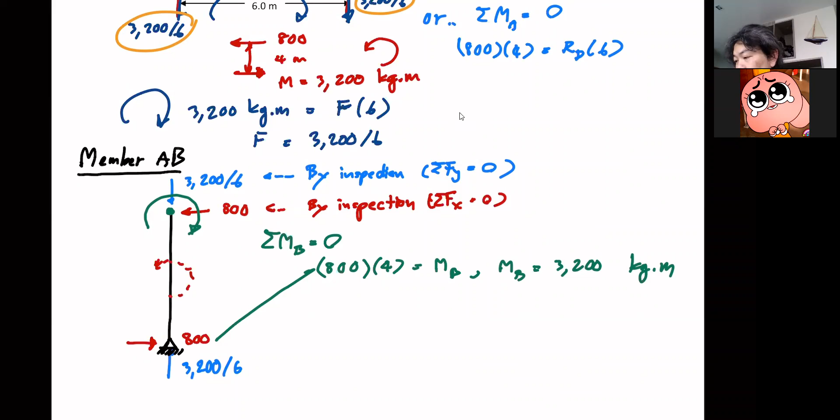Now this is member BC. Let's draw that first, member BC, like this. Now you just need to know that member BC has a joint at B and a joint at C. So joint B will have to take the forces from member AB at the end of this joint. You see, that's the location.

So now you have the clockwise moment at B. You need to have the counterclockwise moment equal to 3200 kilogram meter at B on member BC as well. So this will have to be 3200 kilogram meter.

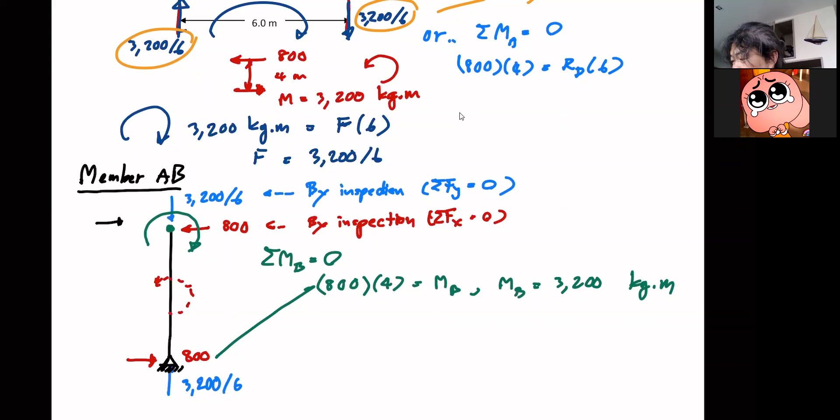Okay, so next is the vertical force, or the axial force, on member AB, 3200 over 6. This one is downward, so you're going to have that upward here. 3200 over 6.

And then the last one: member AB, you have an 800 horizontal force, which is a shear on member AB going to the left. So this 800 is going to go to the right on member BC, and it becomes the axial force on member BC instead.

So now, because this is the force on B, on the end B of member BC, before I proceed I'd like to show you one thing: member BC is quite easy in this case because we don't have any force acting on the member itself. So completing this free body diagram is rather easy, but it's not always like this.

So, maybe I should do this. Okay, so again, take sigma Fx equal to 0. You know right away that this has to be 800 by inspection again.

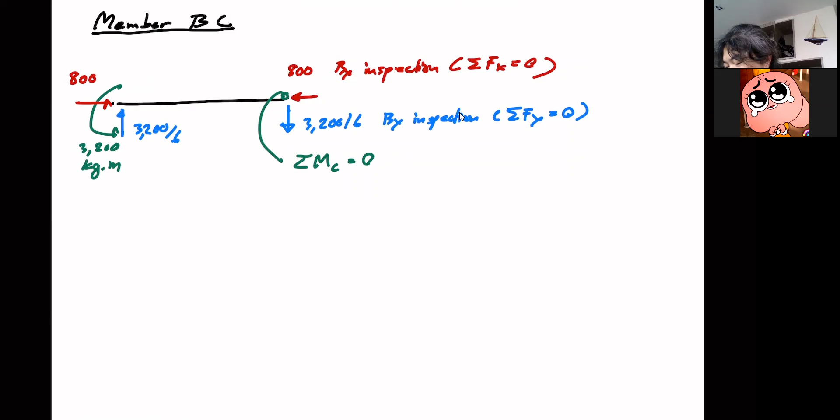Okay, so now what about a moment? You can easily take a moment at C here. Sigma MC equal to 0. So you see, when you take moment at C, you have 3200 as a moment, and let's say it's counterclockwise. I don't mind the sign very much.

Let's say the moment is positive, but you also have this shear minus 3200 over 6, because this one goes in the clockwise direction, the moment itself goes counterclockwise, right? So they have a different sign, and which one is positive doesn't matter for me. This moment arm is the length of the member, which is 6 meters from this, right? That's 6 meters.

So you see, naturally, plus MC equal to 0. Let's use the green. Oh, forgot that, it has to be multiplied by the moment arm, which incidentally is 6, right? No, let me erase this, it's getting messy. Multiplied by the moment arm, which is 6, then plus MC equal to 0. So look what happens here: they are equal, right? So that means MC is equal to 0.

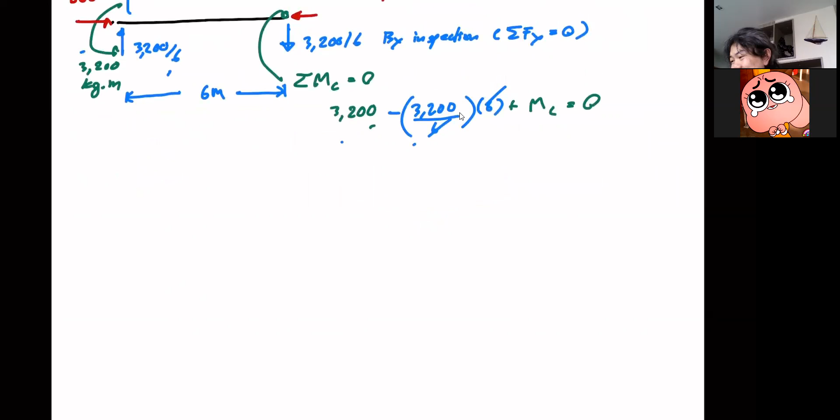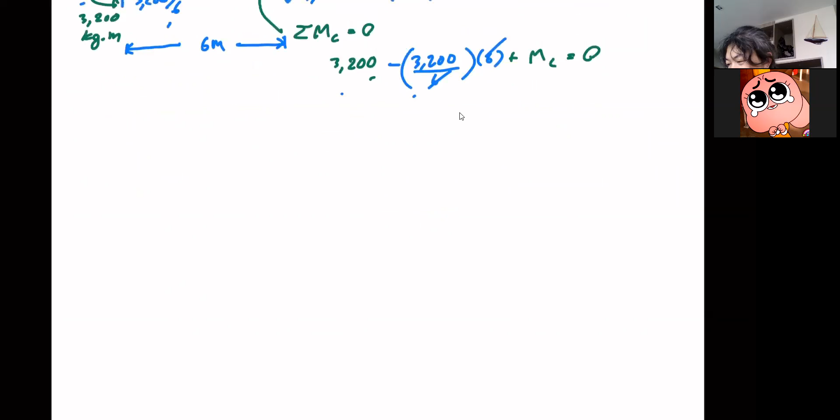Wow, is that possible? It is possible because, let's say, I'm gonna... can I... no. Because when you look at the free body diagram of, let's hope that I have enough, okay, member CD.

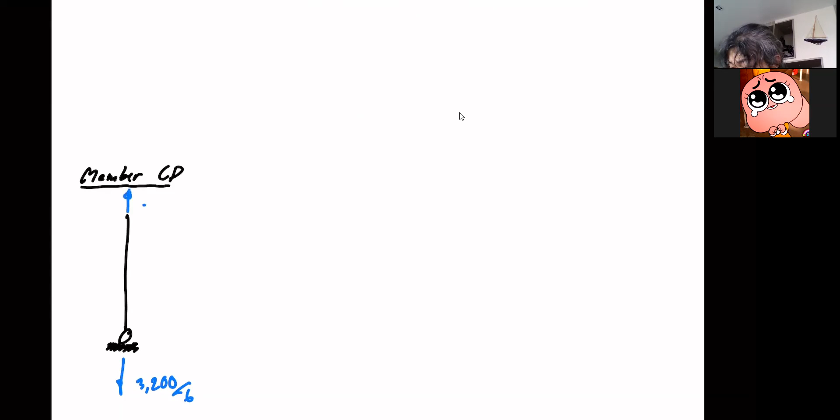Here is a roller. And when you look at member CD, you have the downward reaction of 3200 over 6 there. So by inspection, you know that this better be 3200 over 6 as well.

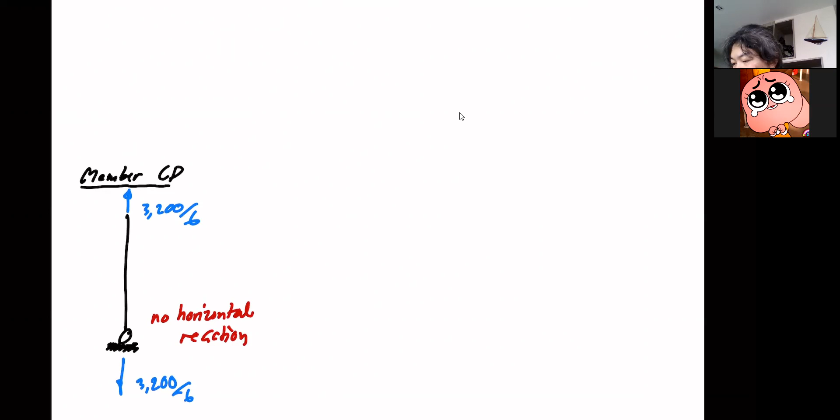There is no horizontal reaction here, right? So if you are going to have some moment at this location, what is there to balance this moment? Because axial force cannot produce moment, right? So if you are going to have a moment at joint C, you better have a horizontal force at D so that you have a chance to balance this moment. So when you know that there is no horizontal reaction here, it's impossible for you to have a moment at C.

So it's only correct that when you take the moment here, sigma MC will give you moment at C equal to 0. In this case, if you have MC not equal to 0, you know right away that you are wrong.

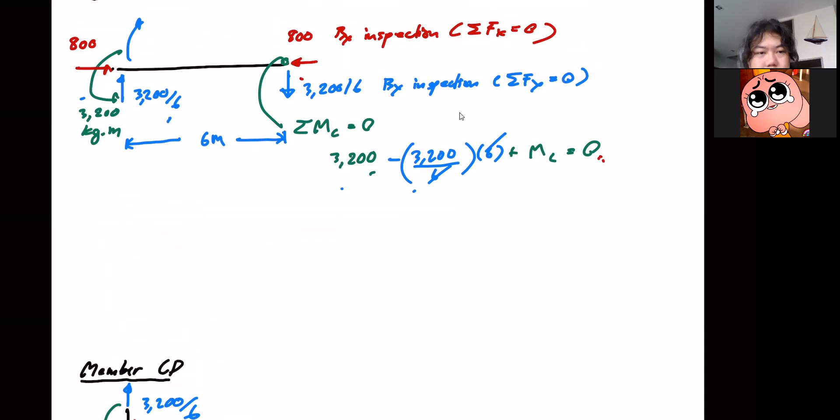Just take a look at the free body diagram of this member alone. That is why I prefer you to draw the support condition on your free body diagram rather than the force. Because if you draw the support here, you will see right away that this is your free body diagram, and you have only this. You cannot have the horizontal force here. No, you can't, meaning this column cannot carry any moment.

We call this a lean column. It only leans onto something. So when you have a support condition like this, you would know right away that there is no chance that you can have moment at C.

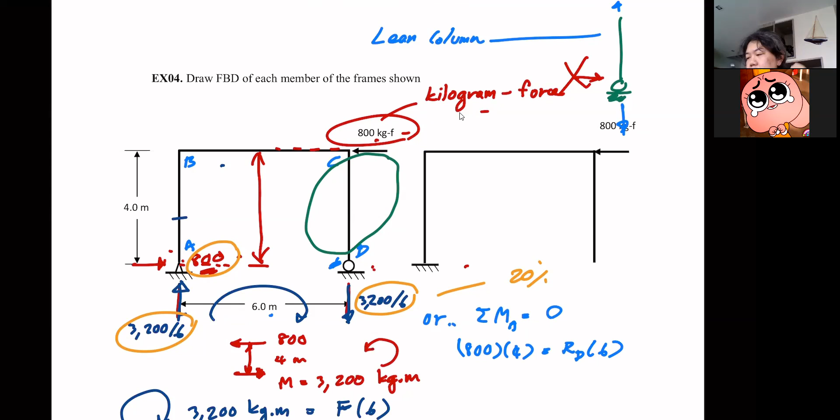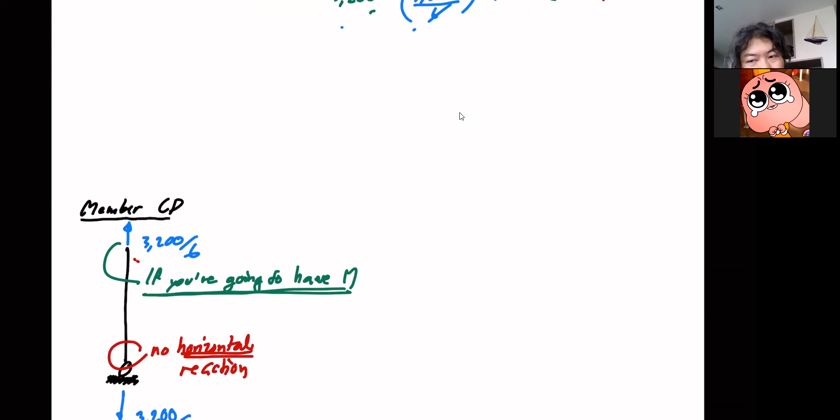Okay guys, so because of this, now you see that right here for member CD, that is the complete free body diagram. It's just the axial force. So this is the lean column, pure column, no moment, no shear whatsoever. So where is the 800 gone?

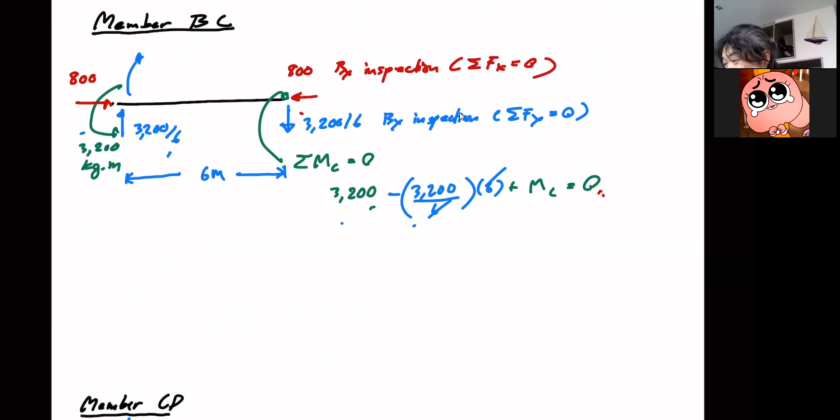Now, to see where the 800 is gone, you need to draw the free body diagram of joint C. That's why we need the free body diagram of the joint now. So this is your C here.

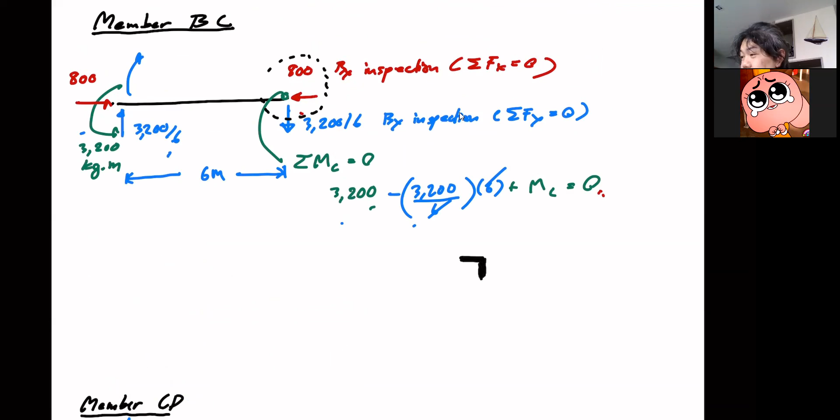So when you look at joint C, you know you have 800 that must go to the right, because this one on member BC here is going to the left. So to balance that, it has to go to the right.

And then you have the downward force, 3200 over 6, down. So this is up, so to balance that, this has to be down. 3200 over 6. So if this is down, it becomes the upward force at this member, you see? So that, voila, it's complete. Everything is correct.

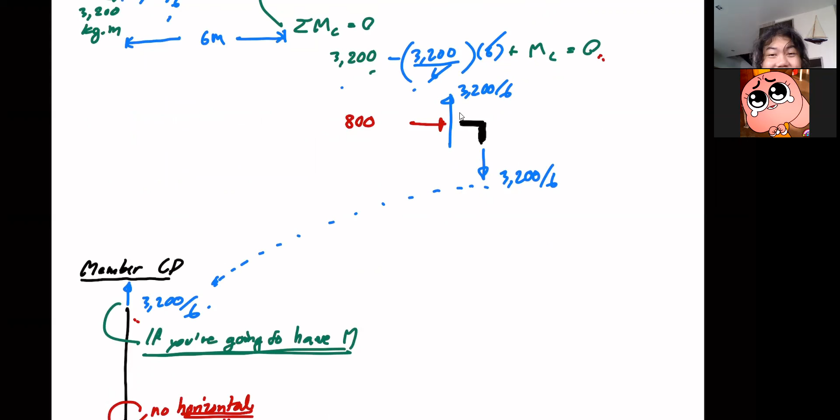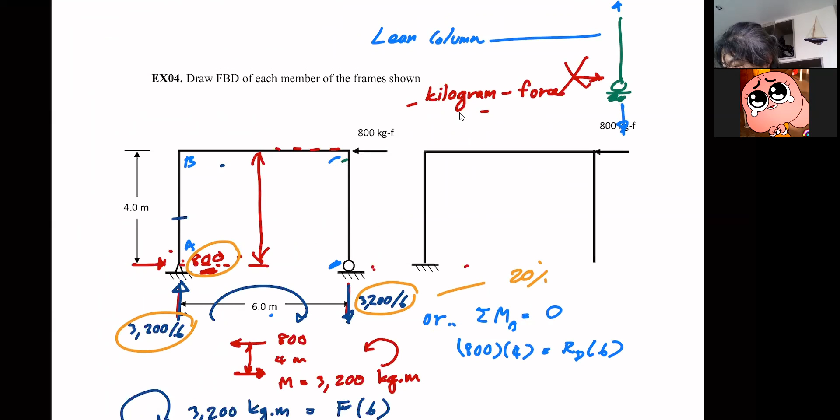And this 800 force is in fact balanced by this one, which is — let me erase this — C and D. This is your external applied force at that particular location, right?

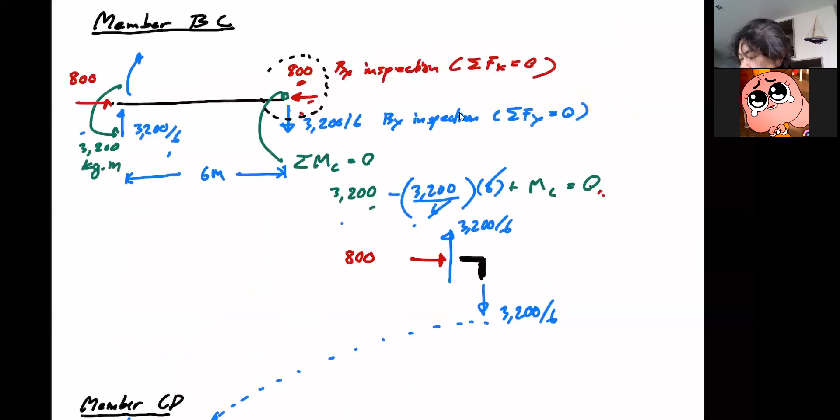Which you must include in your free body diagram. Where could it go, right? It's there. So here is your external applied force equal to 800. So when you look at the free body diagram of this joint, it is perfectly complete. So the 800 is gone because this is equal and opposite, this is equal and opposite, so there is no horizontal force on this location, on another end of your joint.

So no horizontal force coming onto member CD, because if you look at the free body diagram of member CD, you will see right away that you cannot have the force perpendicular to the member. If there is the presence of the force here, you know right away that your member CD will never be under equilibrium. It can't take any shear because it is a roller support in the end.

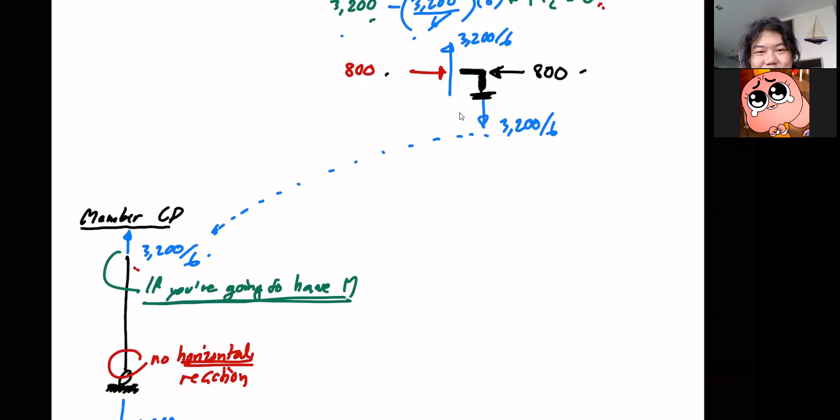Okay, is there any question? Are we crystal clear? Hope so. Yes, yes. What do you mean? Yes, no question, or no, no question. No question, no question. Okay. Yeah, English is supposed to say no.

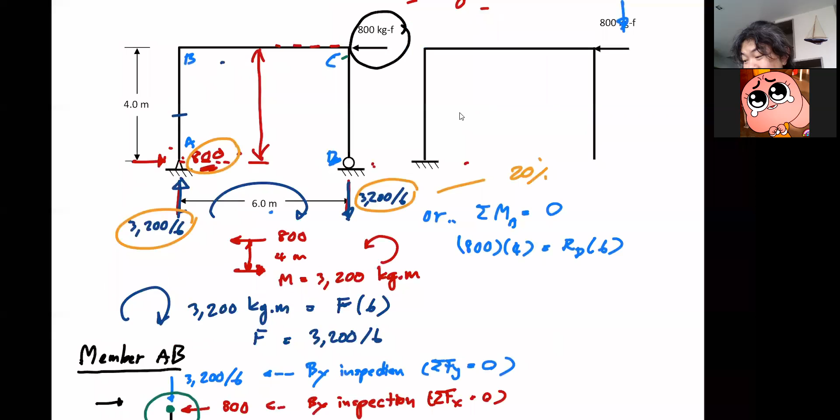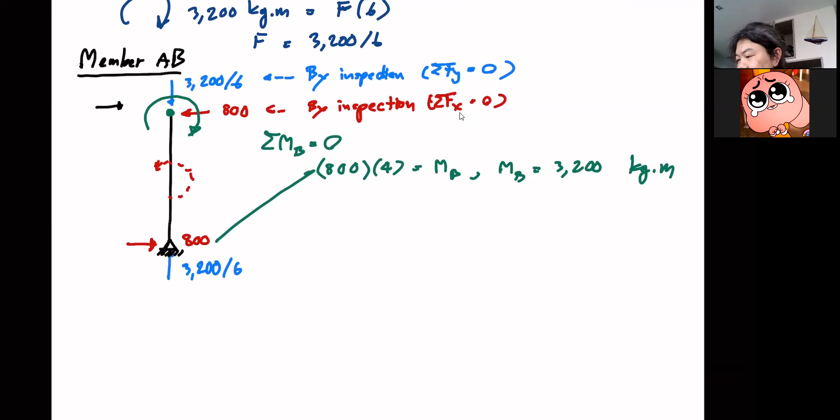Okay, all right, so anyway, we have a job to complete our shear force and bending moment diagram. So I hope you don't mind, it's in the video anyway, and I can do it again here. I think I have enough space.

Another million dollar question doing this is, on which side should I draw my— yes, Nakarin. Nakarin... oh, I pressed the wrong one. Ah, man.

Anyway, it happens. Okay, sir, can I ask you one more question? Please, anytime, please go ahead. How about if we start to consider at member CD? Is it the same as this question?

It is, because in fact you can start your free body diagram, you can start your work anywhere you want, anywhere you wish, anywhere that you think will make your life easiest. In fact, I would myself start from CD because it's easier. But this frame is easy enough to start from anywhere except BC, right? That would be silly. Anyway, yes, the answer is, of course you can.

And the answer would be the same because, mark my words here, ladies and gentlemen, third year students, in your elastic world, one loading condition can have only one equilibrium condition. So that means you have this one frame, you have this load, you can have only one equilibrium. There cannot be a second equilibrium. So to put that straightforward, it means that it doesn't matter where you start, your answer should be the same.

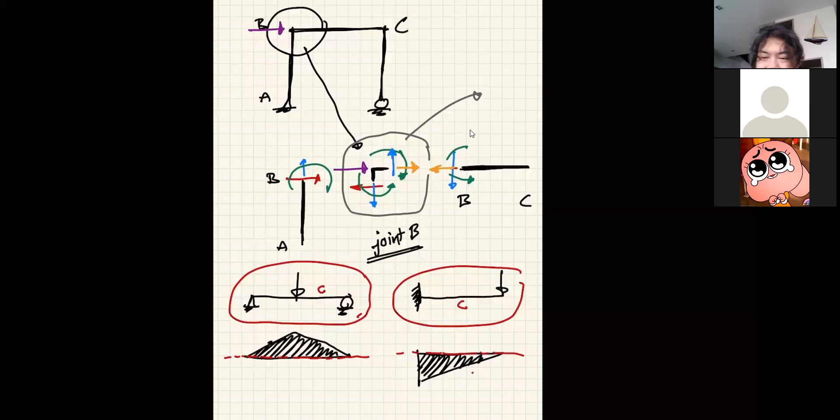What about this beam? Where is your compression? Top or bottom? Bottom, right? So for this beam, you see, naturally, your bending moment diagram is down the zero line now.

That is because we, in this country, tend to draw the bending moment diagram on the compression side of the member. I emphasize: we draw the bending moment diagram on the compression side.

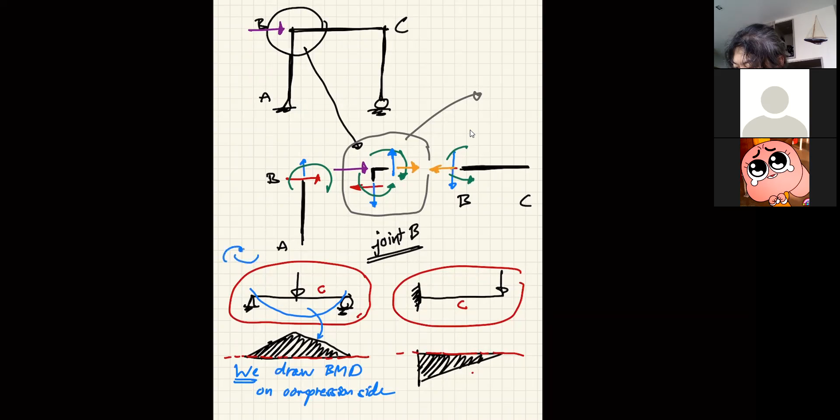Now you guys need to see things better because this is a simple beam, so it bends like this. That is your positive curvature, so it's compression on top. This is also associated with the positive bending moment diagram, so we call it positive curvature as well. And it also is in accordance with your sign convention for positive moment, you see.

So this goes like this. This is your negative sign convention for your bending moment diagram, right? Which is exactly this curvature.

But ladies and gentlemen, I'm going to tell you right now that not every country on this earth draws the bending moment diagram on the compression side. The people with the imperial system, US of A for example, draw the bending moment diagram on the tension side. So with a beam like this, if you go to the US, they draw it like this. And for this, they draw it like that.

Now, I was unfairly mocked by my advisor who said, 'you guys draw a bending moment diagram on the compression side, blah blah blah,' and so on. So it's a little unfair, but they do draw on the tension side.

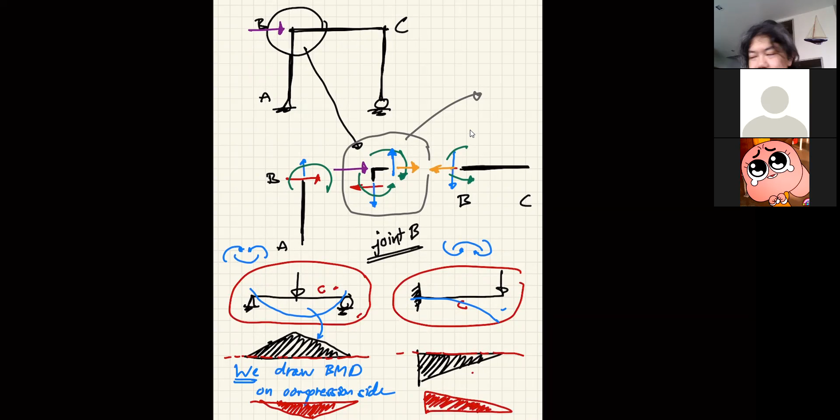The benefit of drawing the bending moment diagram on the tension side is that it will reflect how your beam is going to deflect under load. It gives the deflected shape better, or like this as well. But we are in this country, so I suppose we draw it on the compression side as usual.

So when we come back and look at this member, where is compression, left or right? Now you guys need to feel the structure right away when you see the moment. You just can't say, okay, this is clockwise, this is counterclockwise, let me have 5 minutes to think about this. Engineers must feel stuff like this.

So when you look at the bending moment here, you see how this moment is going to bend your member, right? So here must be compression. Compression is on this side. So if I...

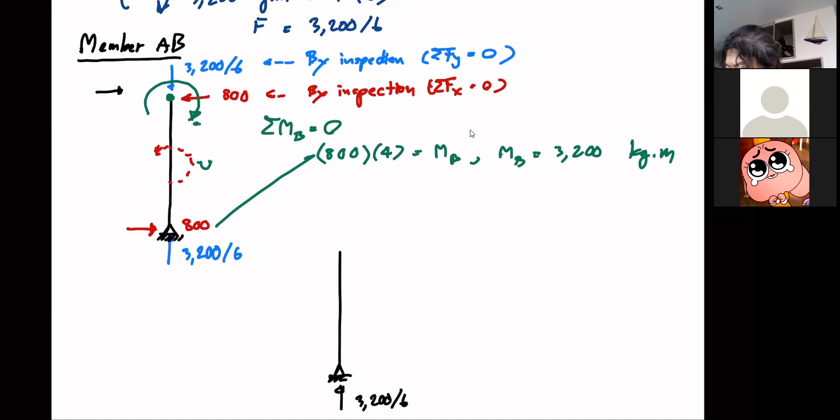...redraw this free body diagram here in this line. Actually, I don't usually draw the axial force diagram. It's not very useful for us because, you know, it's generally constant. So we don't need the diagram, but for the sake of completion, okay.

Now it is your job to draw the free body diagram of this member. So now if you know that this is where compression is, your bending moment diagram is going to be on this side, correct?

And when you look at this beam, you need to turn it upside down, or maybe you can also draw it like this, for your convenience. So that's your 800, 800, and then your moment. It's the same.

So like this, that is my shear force diagram. It's a negative value of 800, right? See, because we have a constant shear. Okay, and this shear force diagram, it's constant shear.

So your bending moment diagram is going to look like that. Ooh, that is minus 3,200 kilogram meter. Okay.

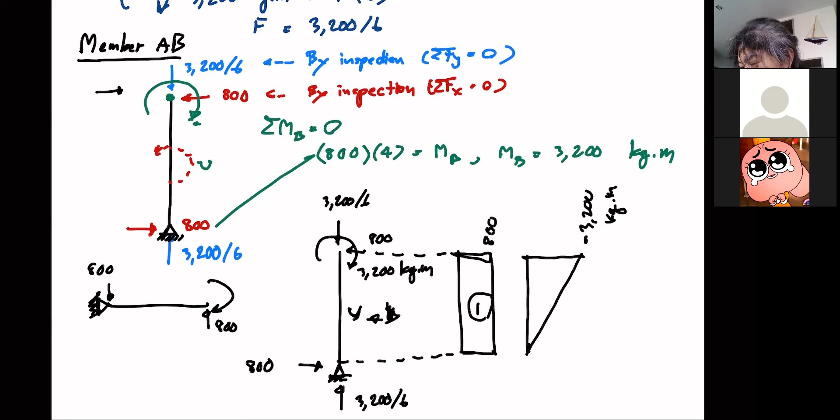Well, I wouldn't mind the sign convention of the shear very much. Let's say if this is the diagram, if your eyes are here, looking at that from that direction. But if your eyes are on this side, your shear force diagram may look different.

Okay. But if we stick to the rule that the bending moment diagram must be on the compression side, your bending moment diagram must always look like this. But from the right, your moment looks negative. If I draw it from the left, and start drawing from this direction, I have the shear, and then the moment will look like a positive value, because if I look from this direction, the sign convention for moment is like this, which is positive. But if I look from this direction, I see the moment as negative. You see?

Is that a question? It's uncomfortable silence, maybe. But let's move on to the next member for the time being.

So you see, we are no longer dealing with a simple beam. If you have the end moment, which you can rightly calculate here, and you know the value, you must draw the diagrams to reflect that there's a moment there. We don't have a moment diagram like this anymore, because this would mean that your moment at B is 0. Now you have the moment at the joint, so your moment diagram would not be just like another simple beam anymore.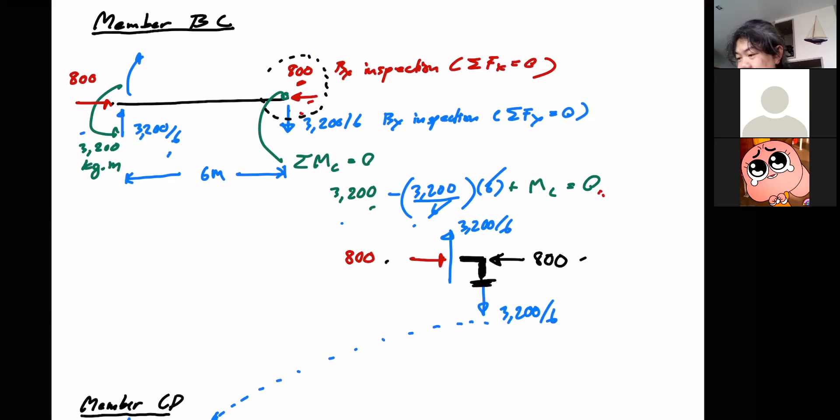Okay, so move on to member BC now. It's pretty simple for member BC because now you have the positive shear, just like a beam now, 3200 over 6 instead of 800. And now you have the moment at B. So this compression is down here on this side. And you see, you begin your moment with the value of minus 3200, and you have the positive shear area. It's going to bring this to 0 in the end.

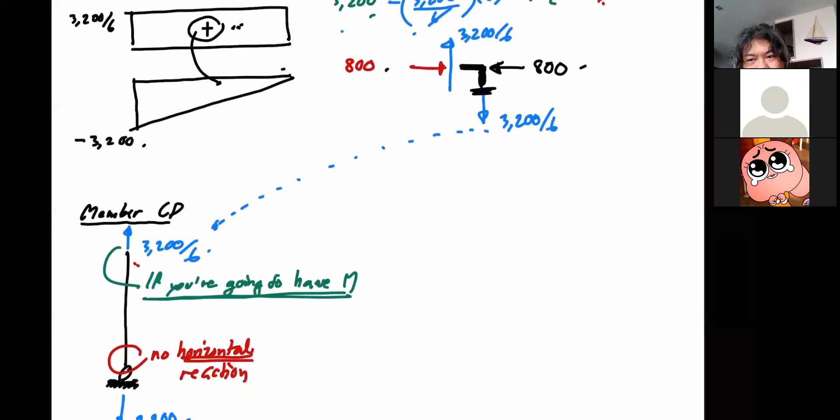So everything will answer itself, because you have a shear like this, so you have a positive shear area. This area will be equal to this value, so in the end your moment becomes 0 at C. All right. Now, for member CD, because we only have the axial force, there is no shear force diagram nor bending moment diagram.

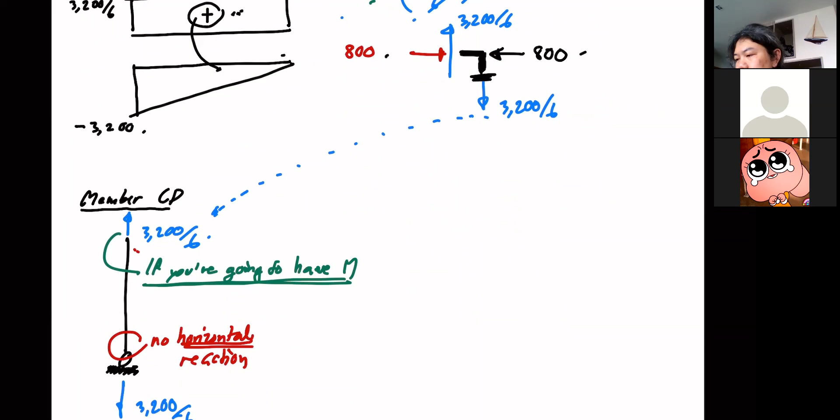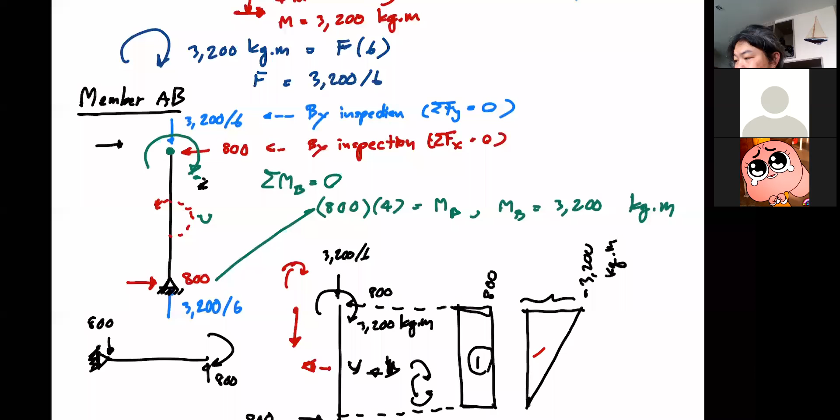Okay, so keep in mind that you need to complete all the free body diagrams first. If you get this diagram correct — let me use a different color — if you get this free body diagram correct, that is, you are at the end of level 2 with all correct free body diagrams. You need to be able to complete all the free body diagrams just to make sure that you have proper equilibrium before you start drawing your shear force and bending moment diagram.

And if you have any doubts, you can always refer to this. Okay, so if you get all the free body diagrams correct, you will get 40%. That means, you know, your nose is just above the water — you just pass, an F level. You just write at the F level. Because you're expected to be able to deal with the free body diagram.

You've done it so many times, but this is just the free body diagrams of members that form a system. If you can get that and get your hands on some portion of the shear force diagram, you will begin to get some points above the threshold. If you complete the shear force diagram and get into the bending moment diagram, you're getting beyond 60% now. So again, if you get all the free body diagrams correct, get some shear force diagram and some bending moment diagram correct, but then mess up some shear force diagram, you back down to level 2. Because third-year students now, you still cannot draw shear force diagrams of members — you must accept that fact.

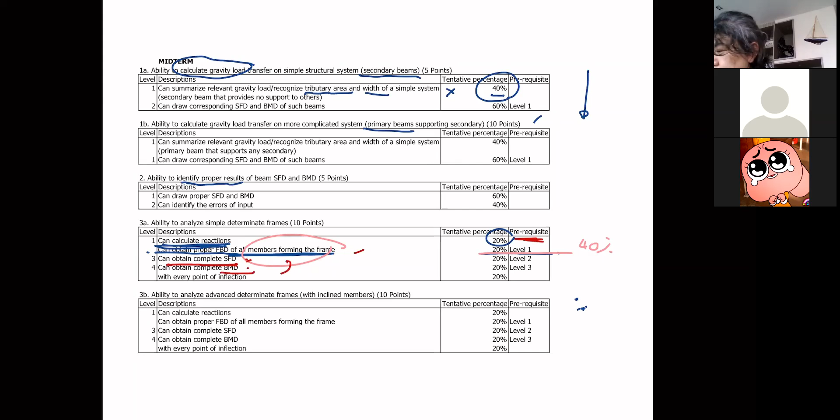And the points go along with your level. Okay, it's a prerequisite here that you can refer to as well. So is there any question? Sorry, wrong one — is there any question?

If there is any question — I have another one, just for fun. Let's say we change the support condition, so we have this instead. Okay, so you see, now I'm going to deal with this. Can I copy this?

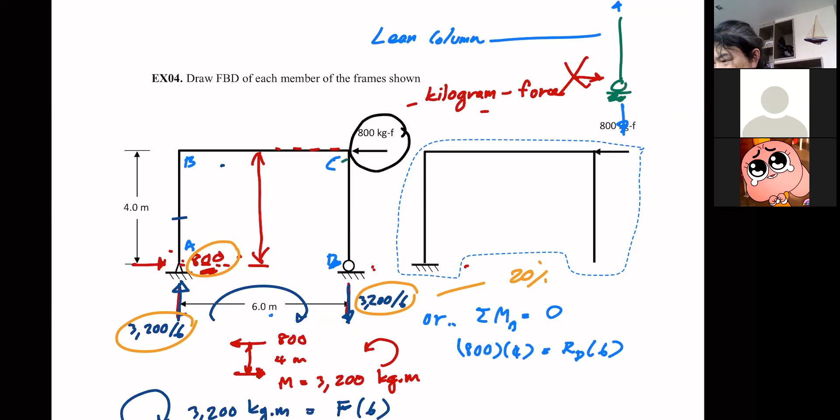Okay. No. So yeah, I can only do that. And that's fine, sorry, all right. That seems to be useful. I can draw it again. That's not that difficult, so anyway.

Now we have this. I just changed the support condition for fun. You'll realize that I have the force here, and then this. You see, if you notice, this portion doesn't do anything. Just might as well remove it, right? So this, with or without this, is just the same. This becomes just a burden because there's no force in it, right?

So I might as well remove it. Okay, so now here. Now you can see that this one has to be 800, right? And now we don't have any vertical load, so there's no vertical reaction. But still, this 800, they don't coincide, so I better have the moment. You see this 800 and that 800, they form the counterclockwise moment. So I'm going to need the clockwise moment here as the reaction, right?

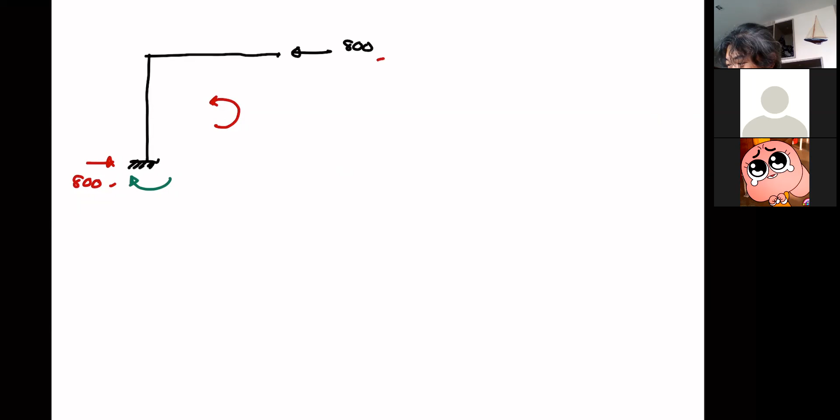It's like that. And how much do we have for the height? I think it's 4 meters, right? Is it? Yes, okay, thank you, right, no need to go back. So this is 4 meters. So that means easily, this is 800 multiplied by 4, that is 3,200 kilogram meter. So I got my reaction. Since this one is pretty easy, I'm just doing it for fun.

To let you guys have more experience, I'm just going to go over it quickly, but if it's too quickly for your comfort, you can let me know. Let's call this A, B, and C. And just like your friends have asked, you can always begin at BC as well, or you can begin at AB, it doesn't matter really. So for the sake of it, let's begin from BC.

BC does nothing. You see, you have the external force here. So rightly so, this has to be 800, right? But that's it. Because BC doesn't do anything, it's just there to take the force from C to B. In fact, this is just one cantilever column. All right, so if this is 800, this is 800. And now we have equilibrium because your sigma fx turns into equilibrium right away.

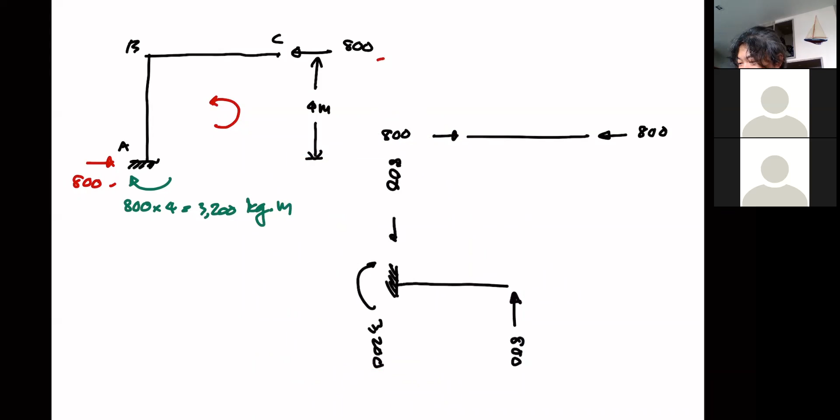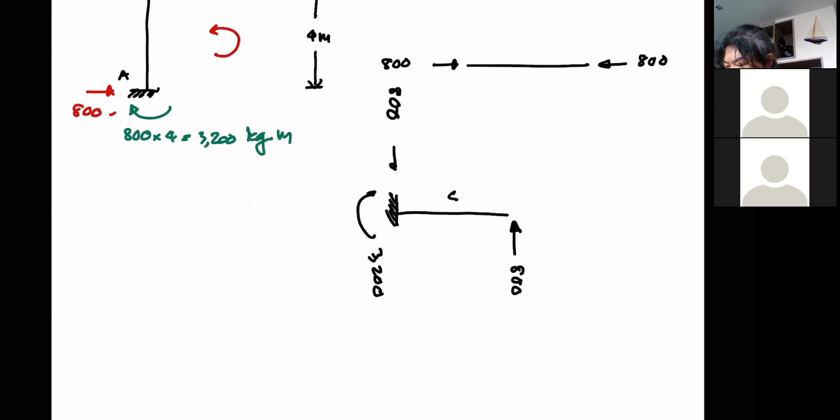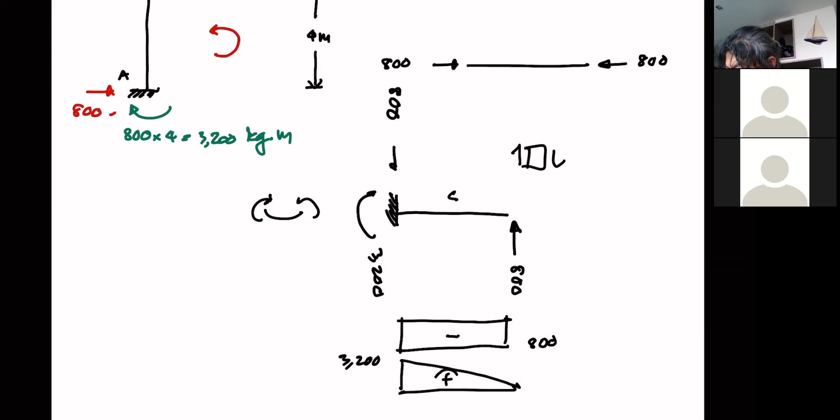Okay, so you can do it like this, and now you can draw your shear force diagram and bending moment diagram very easily, right? This means the compression is here, but when you look at this from this direction, you know you have the positive moment. So your shear force diagram is down and up, positive, right? So it becomes negative. Shear force diagram, 800, and this negative area will bring your moment from positive 3200 to 0. So this is, sorry for not writing it all, shear force diagram and bending moment diagram. Voila, we're done.

Piece of cake, right? Uncomfortable silence. Guys, okay? Okay.

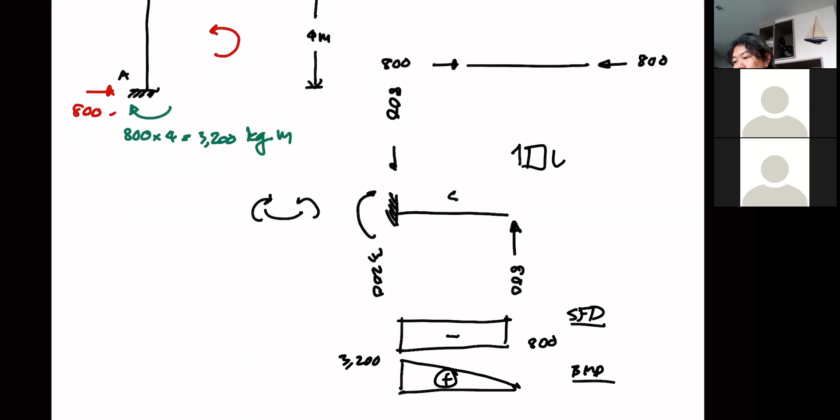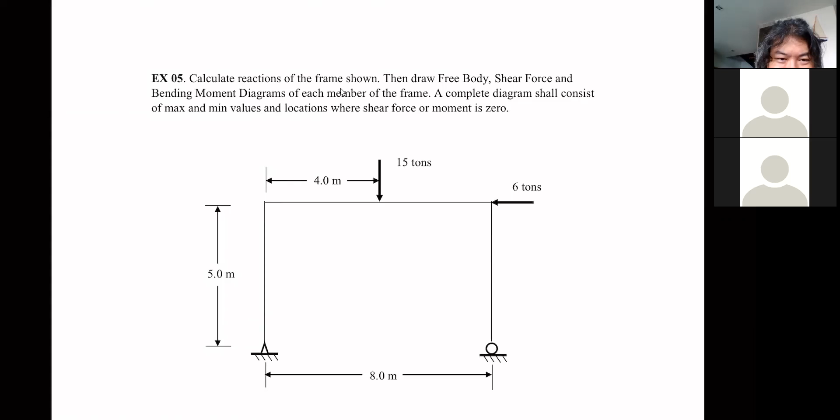So that's, oops, sorry, that is also done with pages to spare. So now we're gonna have, we're beginning to have more load, more fun. But okay, this is one in the chat. Yes. What's me? Yes, okay, yes. All right, so we're gonna do this, but I suppose because the previous example ends rather nicely, and it's been only 40 minutes.

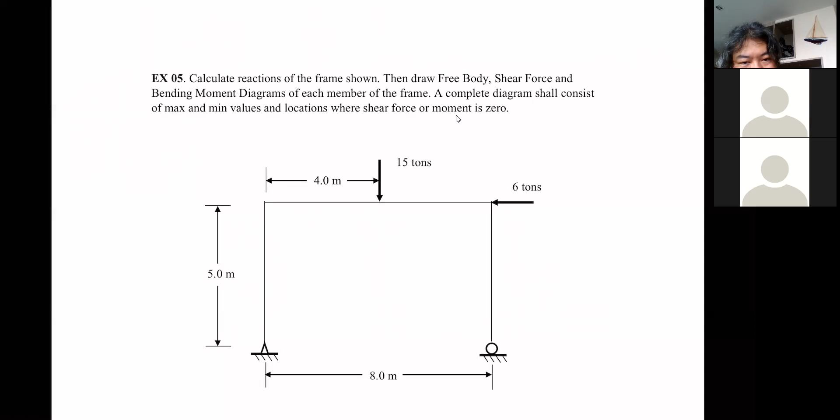We have 10 minutes before the break. So wouldn't it be a nice time to talk about the factor of safety now, or do you think I should keep it at the end? Maybe it's time, maybe, okay. So maybe, all right, so let's talk about factor of safety.

Let's hope that I should be able to end this in 10 minutes. Okay, generally, let's say a factor of safety is always hidden in the design process. If I am going to design, let's say, a cable car, okay, and then this cable is hanging like this, that moves like that, you know, the cable between the valleys and stuff.

You know, the factor of safety involved with the design of this particular cable that supports everything is 6, meaning, they call it omega, is 6. This generally means that if you have one cable that can take the force equal to 12,000 kilogram force, you have a material, you know, with everything.

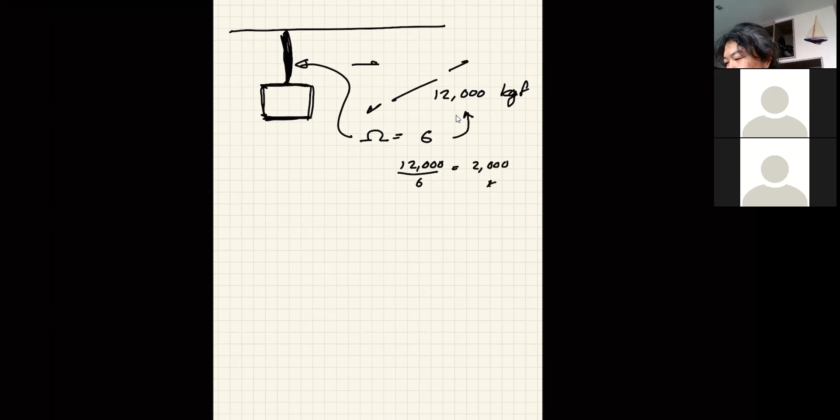You will be allowed to use only 12,000 divided by 6, or 2,000 kilogram force in design. You need to keep the rest somewhere safe. You're not going to use it. Why? Because the cable is a very dangerous structure. If it is torn apart, it means that this is free fall, right? So that's why they use factor of safety so high.

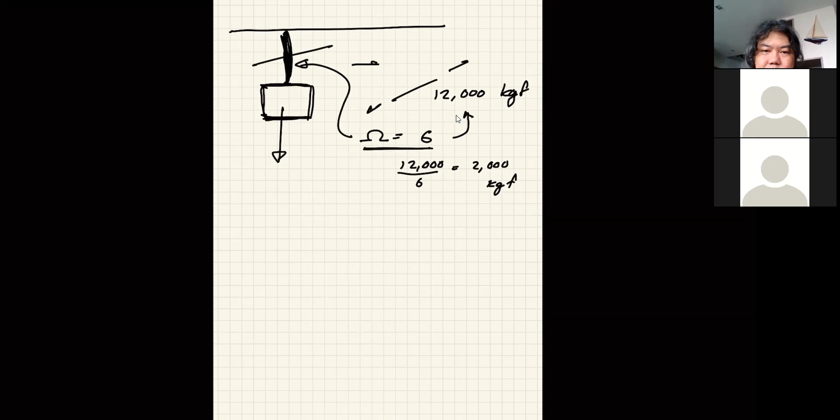So if you have a rod that can withstand 12,000 kilogram force, when you design it, you can only use the force equal to 2,000. Okay. Now let's look at this from another perspective. Let's say in cable. Now you know that this is maybe 20,000 kilogram force. You need to find a cable to support.

Generally, it means this, plainly speaking. So the force that you require must be divided by this. Generally we don't use this kind of symbol anymore. Rightly so, we need to use this symbol. Okay, the force of the cable that you're going to use divided by factor of safety should always be greater than the force that you need. Your cable needs to support this much force. So in the end, it is this.

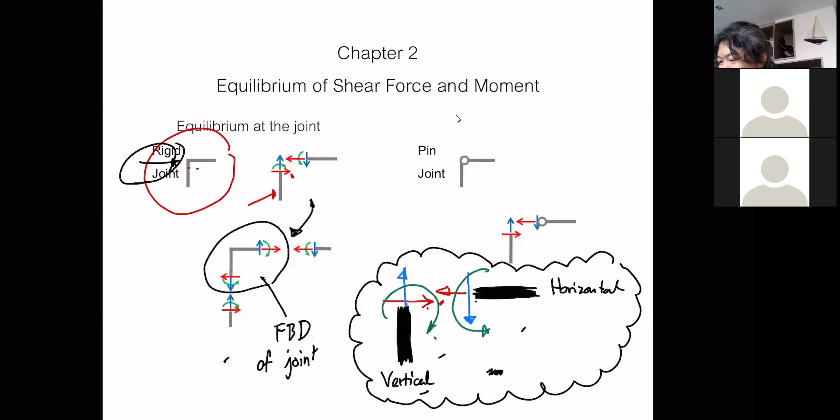So let's say to pass the serviceability, you calculate and you know that you require the moment of inertia equal to 2437.8 centimeter to the power of 4. Now, when you select the section, there's no section with this particular number. So you would have to go for the section with moment of inertia larger than this, right? Common sense. So if you wish to consider serviceability as a factor of safety, you now have factor of safety more than what is required of you. You cannot have less.

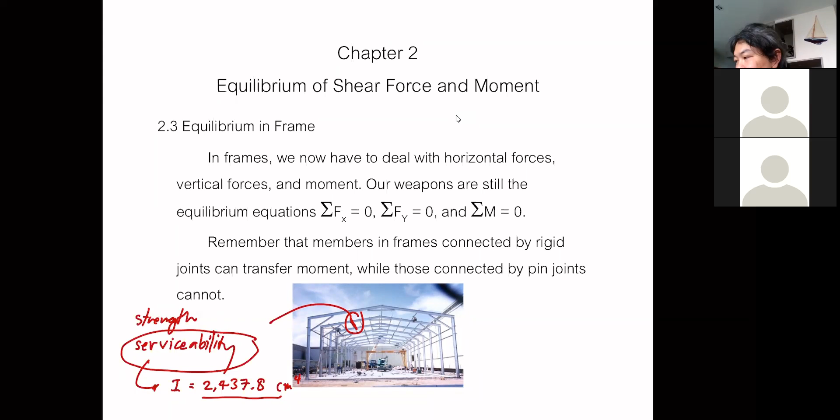Okay, so that's how it works for factor of safety, but it is always generally included in the calculation. It's hidden somewhere in the strength of your material or strength of your structure. You will learn more about this in the design classes, such as RC design, steel design, foundation design, and so on.